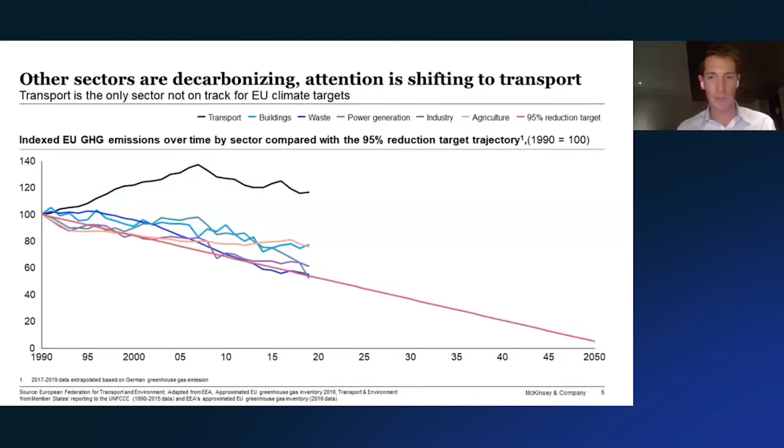So all sectors have to decarbonize, and all stakeholders demand increased efforts to limit greenhouse gas emissions. So this includes investors, employees, and of course, customers. So last year in summer 2019, before Corona, we asked about 5,000 travelers from around the world on their concerns related to climate change and willingness to pay. So a couple of learnings. Firstly, a third of travelers consider to fly less because of climate change, and 8% answered they definitely plan to fly less.

Almost half the respondents are willing to pay a premium of at least 2% of the ticket price to travel environmentally friendly. So that's, for a US$1,000 ticket, more than 20 US dollars. What we don't see on this page is that younger travelers, particularly in the age range of 25 to 34, are much more sensitive about the topic of climate change. And these are the future customers and employees. So the variance between regions, by the way, was much lower than between young and old.

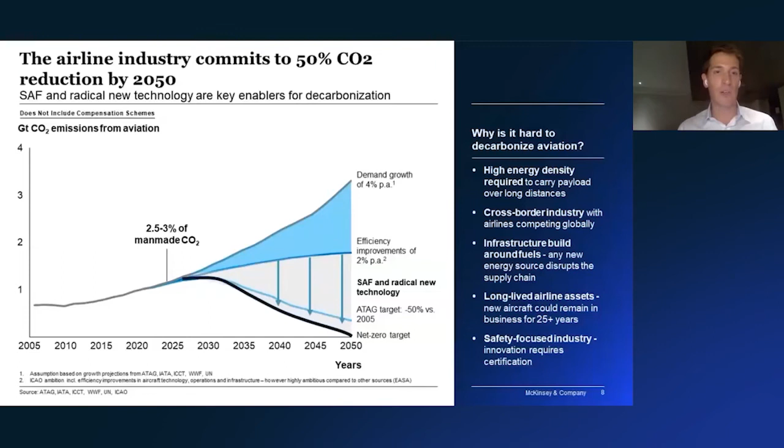Aircraft are long-lived assets. There are aircraft flying today which are way beyond 25 years old, so it would take time until a new technology scales in the global fleet. And then lastly, aviation is very safety-focused, so any innovation requires certification and approval.

Today's battery technology is not yet mature enough to power large-scale aircraft. A battery with the energy of 1 kilogram of fuel would weigh 50 kilograms, and it doesn't become lighter throughout the flight. Next page.

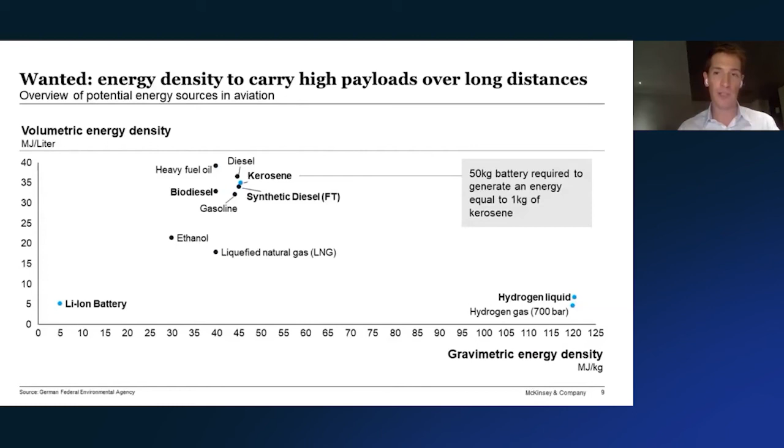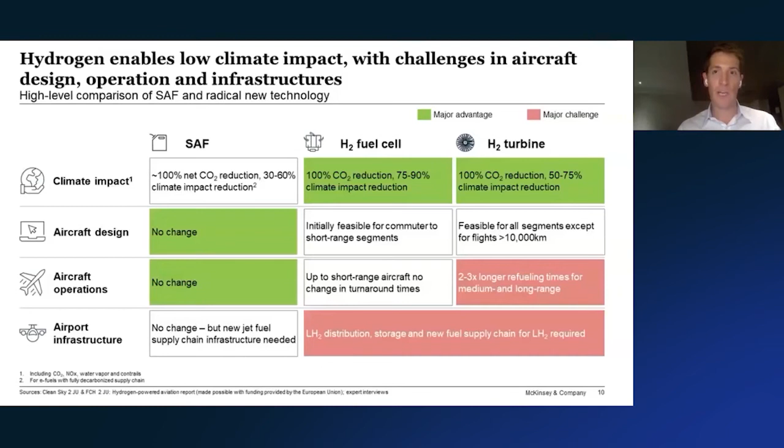So let us now take a closer look at sustainable aviation fuel. And please, Christoph, take us through the Clean Skies for Tomorrow coalition.

You're also on mute. Yeah, thank you, Daniel, and greetings to everybody.

Indeed, over the last year, the World Economic Forum, which is the International Organization for Public-Private Collaboration, has been building the Clean Skies for Tomorrow coalition. And the Clean Skies for Tomorrow coalition is a broad coalition across the whole value chain, including airlines, airports, fuel providers, governments, international organizations, NGOs, civil society, because we are very much convinced that only through concerted action across the whole value chain can you actually make lasting changes.

As an international organization, we're also closely connected with ICAO, and we work with IATA, the airline association, ATAG, the organization out of IATA that works on environment, and ACI, which is the International Airport Association. And we have actually worked with this coalition on 5 work streams.

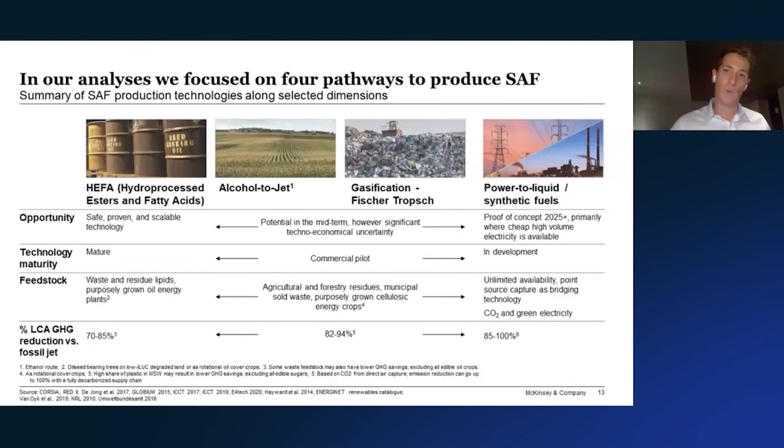So what is the amount of feedstock available to produce sustainable aviation fuel? In a first step, we selected sustainable feedstock types and then sized the availability of each. We worked with reports that are publicly available, but also McKinsey's ACRE tool, which provides information on feedstock density based on geospatial information. Using typical conversion factors, we translated the feedstock availability into practical volumes of sustainable aviation fuel and other products like road diesel, gasoline, and others. The result you see here.

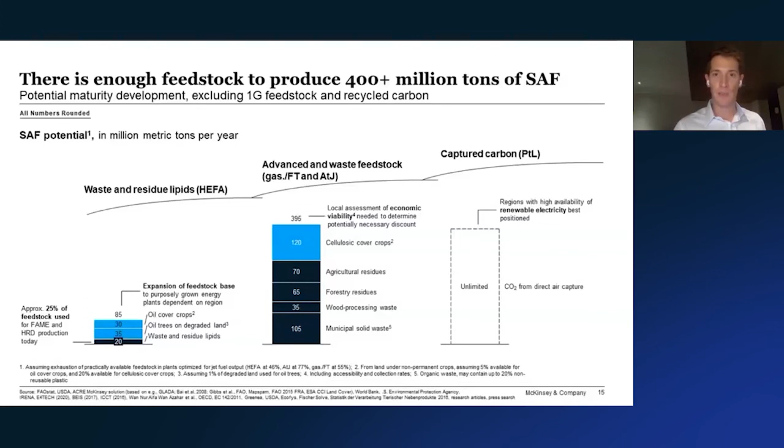Next page. Let's have a look at costs. So during our work with the World Economic Forum, we built a sustainable aviation fuel cost model that looks bottom up at the different cost drivers, feedstocks, and for example, we looked at more than 30 different feedstocks. We looked at different pathways: HEFA, alcohol to jet, gasification, Fischer-Tropsch, and power to liquid fuels. We looked at different feedstock sources, and finally at OPEX and CAPEX costs.

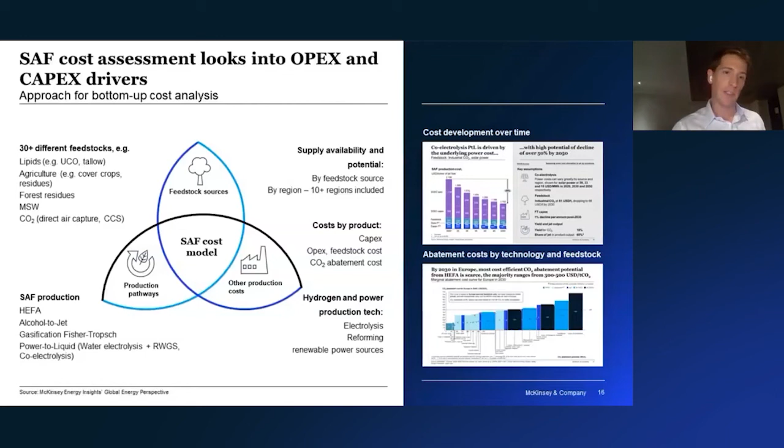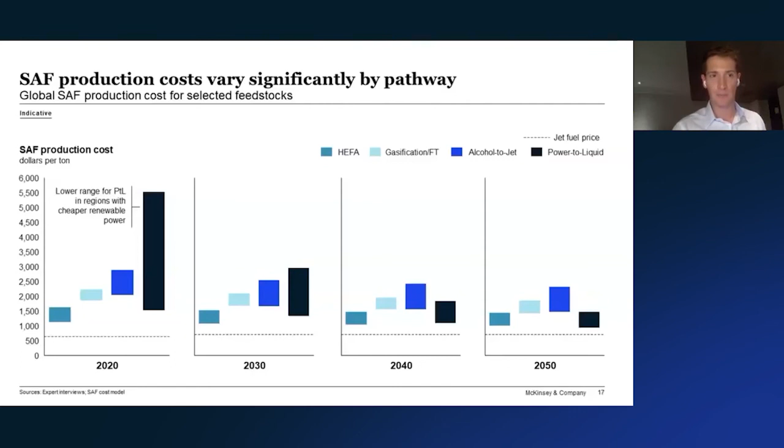So what does it take to scale sustainable aviation fuel? So first, there is a technology challenge. We need technological maturity and cost reduction, particularly for fuels like power to liquid, that we expect to come down in cost significantly. We need a scale up to capture scale effects and more efficient electrolyzers.

Secondly, regulation and financial instruments. We need to see policy frameworks that stimulate demand, be it through CO2 costs, blending mandates, or emission trading. We also need sustainable aviation fuel investment for bridging the cost gap to conventional jet fuel. And then lastly, a sustainable aviation fuel marketplace and accountability, similar to what Christoph introduced, to give customers, be it private or corporate customers, the chance to decarbonize through sustainable aviation fuel, avoiding any double counting.

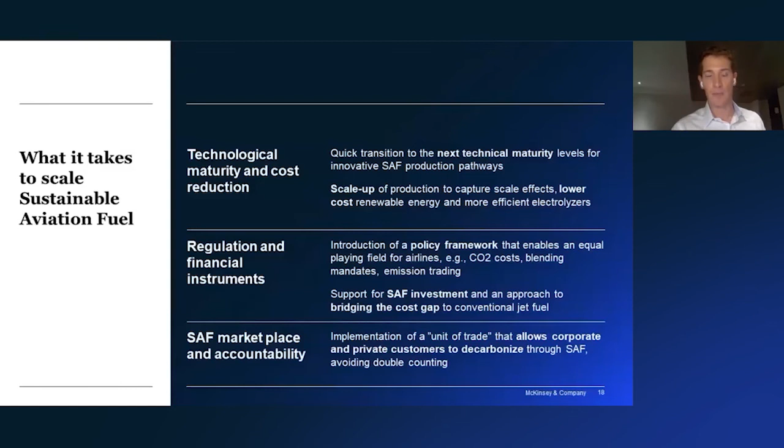So with this, I would hand over to Julian to take us through the hydrogen and aviation work.

Yes, and as you will see in a second, this also has a lot of interconnections to what Daniel also showed already. And just starting from the motivation, as you saw, hydrogen technology is also one of the decarbonization levers. So I will present now the insights from the study on hydrogen-powered aviation, which was published in June this year. We conducted the study for the Fuel Cells and Hydrogen and the Clean Sky joint undertakings, and it was made possible with the funding of the European Union.

You can download the report on the website of the joint undertakings. As you can see here on the left, there were 24 organizations involved. We worked together, and a big thank you to them as well. Together, we developed a fact-based perspective on hydrogen-powered aviation and evaluated whether hydrogen has potential, what technology developments are necessary, at what costs it could be realized, and what challenges need to be overcome.

The objective of the study was neither to give predictions nor to have a detailed technical feasibility study. The purpose was more to understand whether hydrogen has potential, and therefore whether serious research and development efforts should be devoted towards its development. So we analyzed the aircraft design and the infrastructure required, and the focus was on hydrogen propulsion. So if you look into the aircraft itself, it could be an aircraft that reacts hydrogen in fuel cells and then powers an electric motor, an aircraft that burns hydrogen in turbines, or a combination of both, so a hybrid hydrogen aircraft.

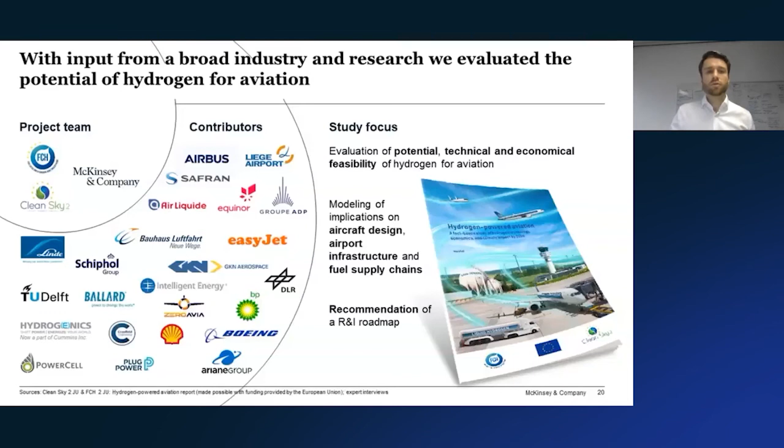Our findings demonstrate that hydrogen has significant potential to decarbonize aviation alongside other technologies. So it's not the only solution, which already answers some questions I can see in the chat. And we will give you some outlook on what could be its role as part of the solution. So first, let us take a look into the climate impact again, which Daniel already spoke a bit about, and why this might also be a driver for hydrogen aviation.

Here you can see that it's not only about the CO2 emissions, but also beyond CO2. So, for example, nitrogen oxides, soot, water vapor, and then also the creation of contrails and cirrus clouds. These non-CO2 emissions have to be considered as well for their climate effects. So to assess the full contribution, you need to consider both emissions. And before I guide you through this matrix here, it's very important to say that there is still an ongoing scientific debate on how much these non-CO2 emissions contribute and how they are translated into one aggregate measure. In this study, we used the concept of global warming potential, measured in CO2 equivalents over a time horizon until the year 2100.

So for conventional aircraft, research shows an overall climate impact that could be 2 to 4 times the effect from CO2 emissions alone. And this breaks down into the different aspects. If you now look into the available technology and new fuels, we see this changing by introducing these. Starting with the CO2 here on the left, synfuel produces CO2 emissions in flight, but can offset these emissions, as Daniel already said, for example from biofuels. But if you really want a clear net zero, you would extract the carbon from the air. Hydrogen propulsion does not produce any CO2.

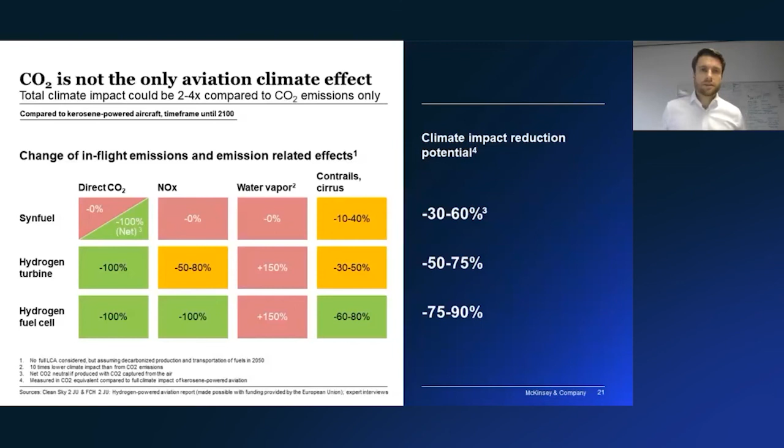So let us have a look into the methodology we applied to look into the potential of hydrogen. So we started by clustering the commercial aviation sector in 5 different segments. You can see them split by their PAX number on the left, so from commuter to long-range aircraft, and in the range being flown with these aircraft, and projected the CO2 emissions here.

So what you can see as key messages from this slide is that roughly 2/3 of CO2 emissions come from flights operated by short-range and medium-range aircraft, so 81 to 250 passengers. And these aircraft also account for 70% of the global fleet. Secondly, less than 5% of the CO2 emissions come from regional and commuter aircraft segments, and the rest comes from long-range aircraft.

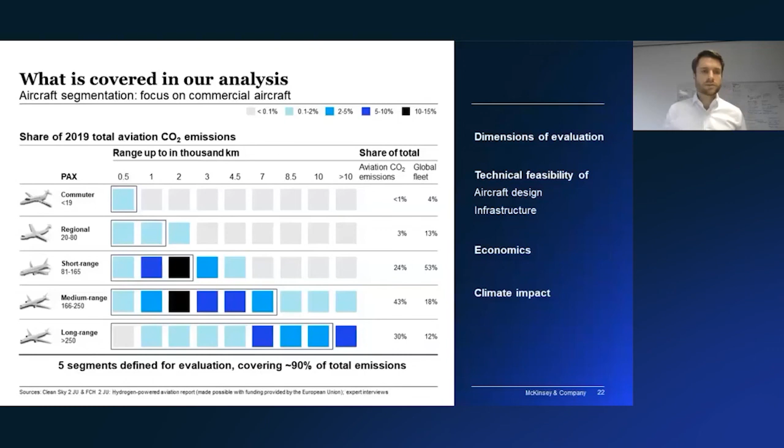What we now did in the study was to have one concept aircraft for each of the segments, and we designed them and analyzed them. And here you can see a first result, looking into the technical feasibility for the aircraft design itself. So on the right here, you see the aircraft, which is an exemplary aircraft for the short range. So it can transport 165 passengers and fly 2,000 kilometers. Just for the framing, it's important to also mention our partner here. So the simulations for the aircraft concepts were done together with the German Aerospace Center.

As you can see, this aircraft looks really familiar probably to you. It's a classical tube and wing design. It's also very close to an Airbus A320, just with the difference that it's modified to fit in a hydrogen tank, a fuel cell, and also a hydrogen turbine. And in our analysis, we found 4 different challenges that need to be overcome to make this feasible. So first of all, it's the liquid storage for hydrogen.

You see it here. We would need twice as high energy density for the tanks than are already available today. Then second, you have the distribution of the liquid hydrogen throughout the aircraft. And there it's really important to have reliable and safe systems that also prevent any risk or safety issues if hydrogen, for example, could leak. The third aspect are the fuel cell systems. So they need to be very powerful in terms of the power density, going up to 2 kilowatts per kilogram, but also in the absolute power rating, up to around 10 megawatts.

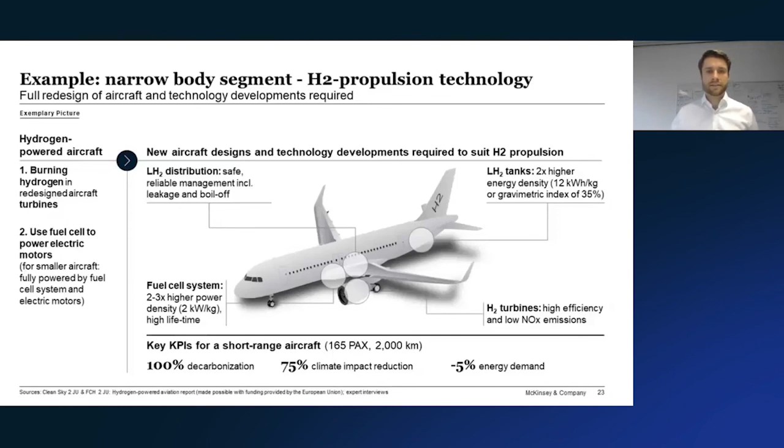So we saw that in total, you could reach 100% decarbonization with such an aircraft, a 75% reduction in climate impact, and even a 5% reduction in energy demand compared to a conventional technology in 2035. And all of this could be made possible by entry into service in 15 years already. So hydrogen propulsion not only has an impact on the aircraft, but also on the infrastructure, as Daniel already highlighted. So on the next page, I will show you in 2 horizons the challenges that we see have to be mastered here as well.

So on the 3 rows, you see the major aspects that are important for infrastructure updates. It's first the liquid hydrogen supply chain, then the on-site refueling and aircraft operations. And we split the development into 2 horizons. The first one until 2040 and the second one from 2040 to 2050. In this first time horizon, we see that only commuter to short-range aircraft would be out on the market and would be possible to fly on hydrogen. Therefore, we do not see any insurmountable technical roadblocks. And the major aspects in that time would be that the hydrogen demand would be served from central hydrogen supply sites, and truck-based refueling and transportation would be needed.

This would also not require larger infrastructure updates at airports, since you would only have hydrogen trucks there. As well, on the refueling times, we see that they would become longer due to the volumetric density of liquid hydrogen. But for short-range aircraft, we see still that it fits into current time windows for turnaround operations. However, even in the first horizon, it is important to come up with new safety procedures and new processes for ground operation.

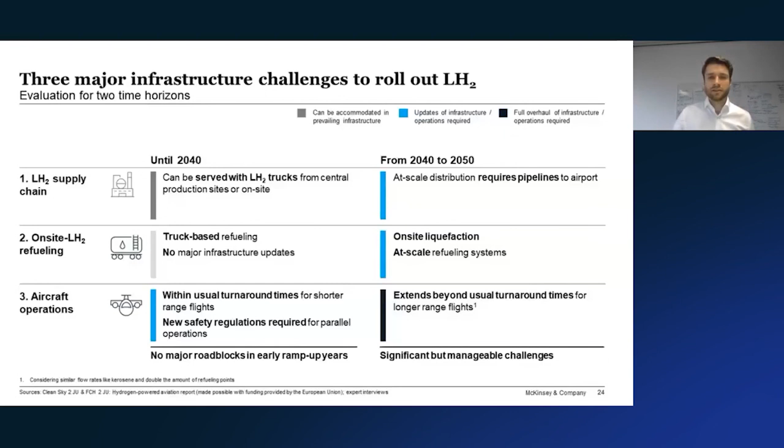So what do these two aspects for hydrogen now mean for a scenario that you could imagine for the year 2050? So if we look into this, we came up with a scenario that has the overall goal to decarbonize the aviation sector and to have a result which allows hydrogen and sustainable aviation fuels. So kind of the summary of what we heard now today. And we see both as complementary.

In this scenario, we see that hydrogen-powered aircraft could significantly be important for the commuter to short-range segments and also half of the medium-range segments, depending there on the range being flown, even with a later development of medium-range aircraft probably being available after 2040. And if you now look into these scenarios, you can also see that the rest, the long range, would be powered by synthetic fuels, which has the effect that the long-range segment, which we do not see as an economic option until 2050, would also be powered by synthetic fuels.

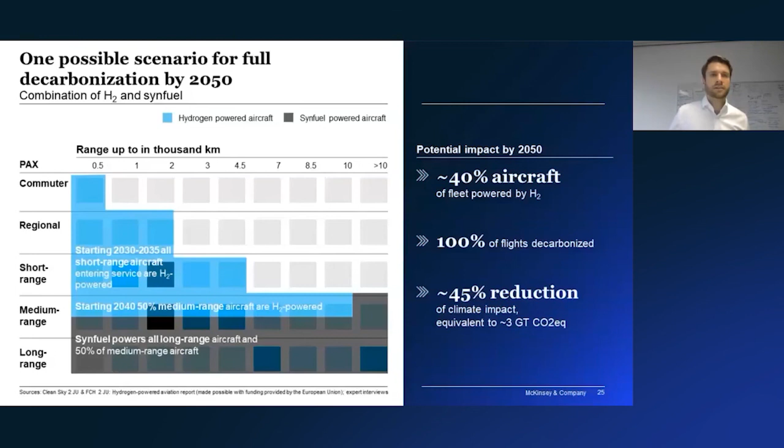In such a scenario, as a result, you see that 40% of the global fleet could be hydrogen-powered aircraft. We would achieve a net zero target for aviation, and we could even reduce climate impact by 45%, which is around 3 gigatons of CO2 equivalent compared to a baseline for 2050. So this scenario illustrates that hydrogen could play an important role in decarbonizing the industry together with synfuels. However, for the hydrogen part, we must invest in R&I to achieve the projected entry into service dates.

And here you can see the derived roadmap we see for this. So in order to get where we want in 2050, these are the key enablers for hydrogen-powered aviation. We see 3 major milestones along the timeline. In 2028, there would be the proof of technical feasibility and certification needed, most likely for a commuter aircraft, and also a short-range aircraft being demonstrated already. In 2035, this would then also extend to the medium-range sector, and there it becomes also important to have safe and efficient airport refueling setups.

In the long term, we see that it would also be an interesting field to further pursue research into revolutionary aircraft designs, for example, the MAVERIC from Airbus. And we also see very large-scale refueling infrastructure being needed if you want to have very large volumes at airports. If you want to look more into these different aspects, you can see here we detailed it down for components, aircraft systems, infrastructure, and also the regulatory framework needed, as we already saw for synfuels and SAF in general. Please have a look into the report and find out more about it there.

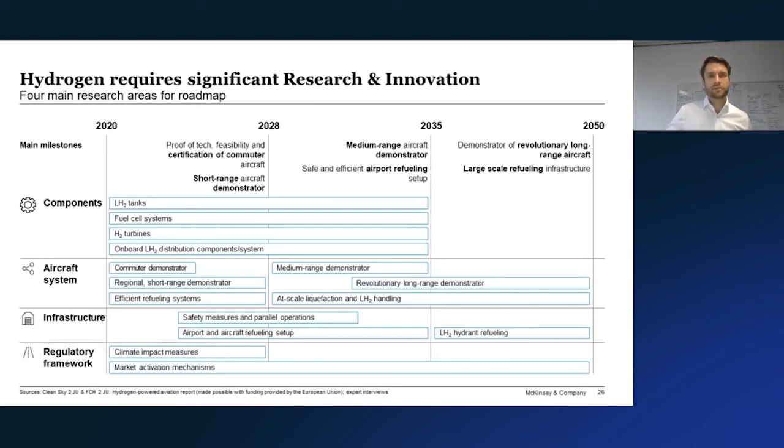So now you've seen our insights into what role hydrogen could play for sustainability in aviation. And before we come to your questions, I would quickly summarize the key takeaways from the webinar. So the three main messages. We have shown that sustainability in aviation is a license to operate. This means that the sector is under pressure to reduce its climate impact, and we see that evolutionary improvements may not be sufficient for this. To succeed with the challenge, we found that SAF and hydrogen are promising and complementary options.

Secondly, there is enough feedstock to power aviation with SAF. We showed you the different production pathways that would fit the projected fuel demand of the sector. Therefore, regulation is required to enable the relevant scale-up of the technologies. And the third message is that hydrogen propulsion offers an even higher potential to reduce climate impact, beyond CO2. This could be done by fuel cell and hydrogen combustion technologies. Nevertheless, we identified a significant R&I roadmap. It requires significant investments already today.